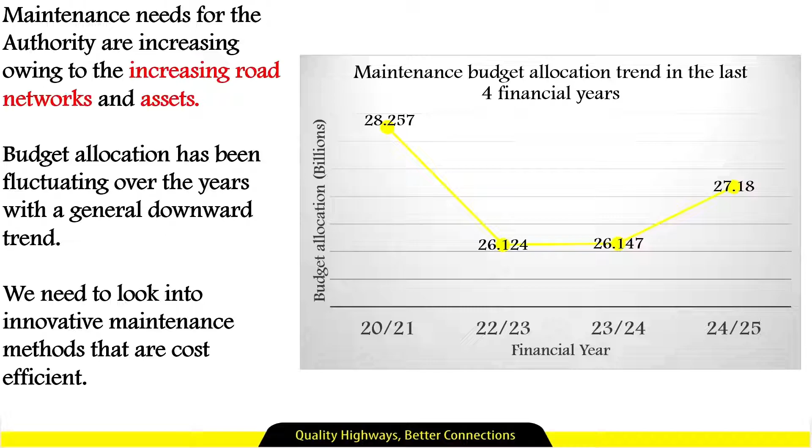For this reason, it is important for us as civil engineers to be very keen on our maintenance processes. Now I'd like to provide a brief background so you can understand the nature of our problem. Maintenance needs for the authority have been constantly increasing because of the increase in road networks and road assets. As you can see on the graph of budget allocation against financial year, the budget allocation has been fluctuating, but with a general downward trend. So what does this mean for us? It means that the money we have cannot cater for our maintenance needs. It then prompts us to think of innovative ways that are cost-effective while at the same time efficient in managing our bridges.

Let's have a look at bridge management. Traditionally, bridge management systems were characterized by being visual and manual.

Bridge management processes traditionally relied heavily on visual observations and manual processes such as destructive tests and non-destructive tests. For example, acoustical tests like the hammer or the chain drag, or other tests such as magnetic particle testing for identifying fatigue cracks in steel bridges.

It was also characterized by being reactive, where we would only take action when there's extreme deterioration or total collapse or sectional collapse of a bridge. Again, it was characterized by being standardized, where all types of bridges would be subjected to the same kind of maintenance treatments, regardless of the type of bridge.

This resulted in various limitations, such as delayed detection of damages, or high costs. Again, we also have the lack of safety to bridge inspectors, and also the process could be subjective because the kind of inspection results from one bridge inspector to another would be different with human errors.

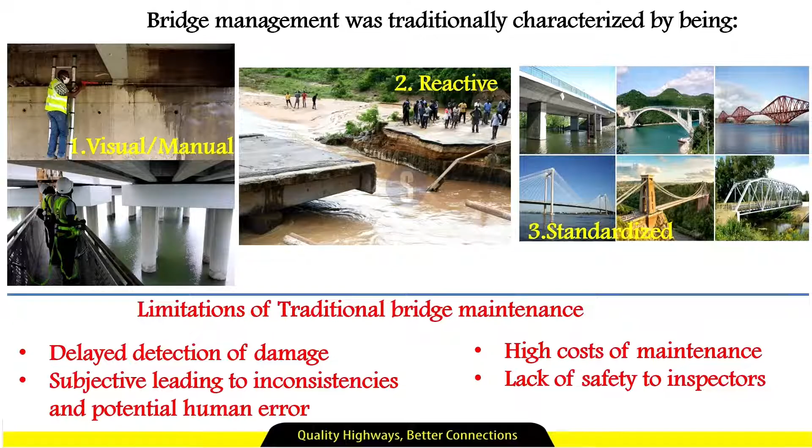So as engineers, all over the world now, engineers are thinking and asking themselves, how can we make our bridge management systems be predictive rather than reactive? How can we ensure that the results are not subjective? How can we ensure less costs, and how can we ensure safety to our inspectors.

So this leads me to this next slide, which is on the integration of artificial intelligence on bridge management processes. So what is artificial intelligence? Artificial intelligence is the simulation of human intelligence processes by machines.

The creation of the AI model will depend on what you require. What do you want your AI model to perform? So we have several building blocks like machine learning, neural networks, computer vision, natural language processing, and robotics. You can use one or a combination of these building blocks to create your AI model.

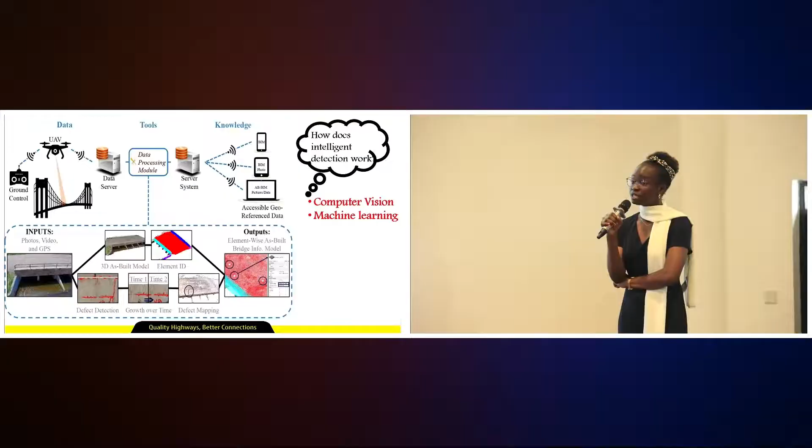As you can see on this slide, today we have several equipment that are used in the bridge inspection processes. For example, drones, high-resolution cameras, and even 3D scanners. These equipment are now integrated with AI tools, for example, machine learning and computer vision.

This equipment provides us with data such as photos and videos, which we can then input into our system. As you can see on this slide, the system can generate for us 3D models, either from point clouds or finite element analysis models.

The system can also be able to detect defects on the surface of the bridge and monitor its growth over time, and even map it on the 3D models. And this can be very efficient in allowing us to do our monitoring processes.

So I'll discuss two examples for intelligent detection. In this example, we have crack detection with AI analysis. We have high-resolution cameras or drones taking photos of a section of a bridge that we're particularly interested in. And then, with the AI detection system, we are able to map the cracks on the surface of interest.

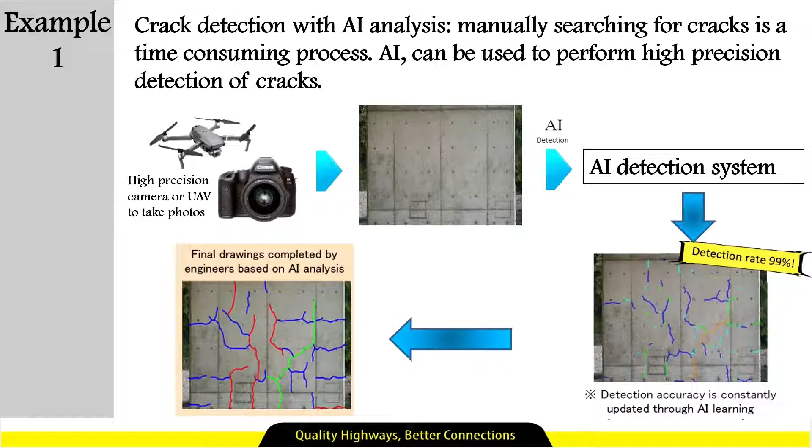For example, in this case, the AI detection system used is called Kumonos AI, and it is a system developed by Kumonos Corporation in Japan. It has a detection rate of 99%, and the accuracy is constantly updated through AI learning.

This is important for us because instead of going to site and randomly checking where the cracks are, or manually searching for the cracks, the system already tells you where you need to go and look.

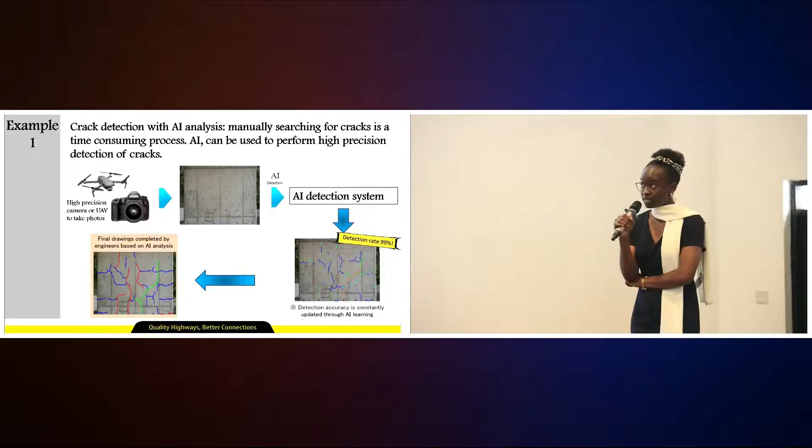The second example is again an instrument from the same company, Kumonos Corporation. It's a surveying instrument that has a built-in concentric crack gauge, and it can be used to obtain the crack lengths, the widths, and the position data.

So these two examples fall under intelligent detection. Next, I will discuss digital twins.

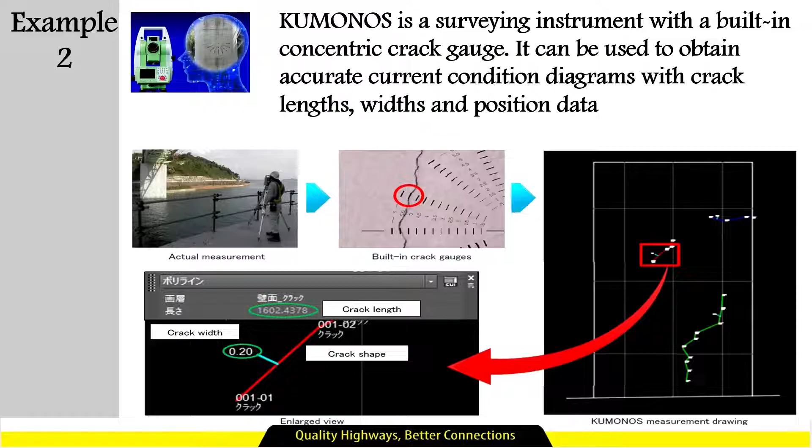Next, I will do a discussion on digital twins. So what is a digital twin? In our context, a digital twin refers to a virtual representation or a virtual model of our bridge structure.

For example, let's say we have this particular target bridge. We use a 3D scanner placed at different setup locations around the bridge, and we obtain data from it in the form of point clouds. We can then use this point cloud data to generate a 3D mesh representative of the surface of the bridge, as you can see in this photo.

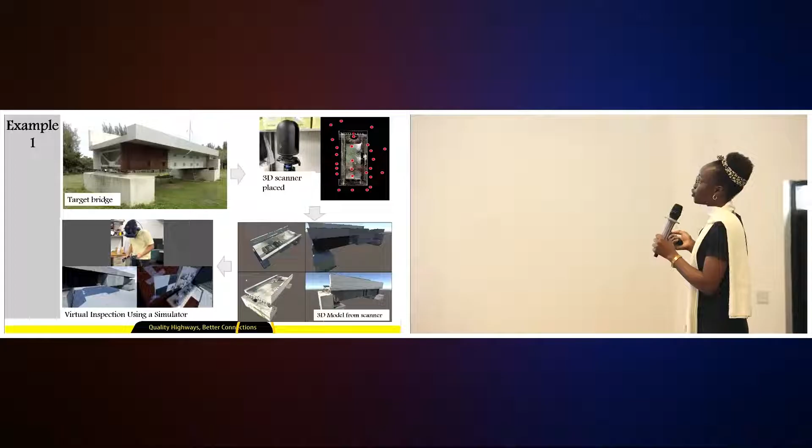The 3D model can then be integrated with AI such that sensors installed on the target bridge continually, in real time, feed the 3D model so that it is able to mimic the behavior of the bridge. Currently, there are even studies to see if we can undertake virtual inspection using virtual simulators.

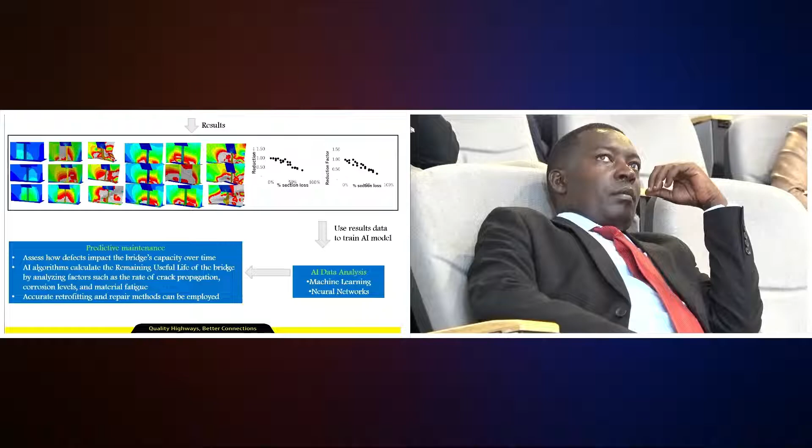So from this particular simulation, we're able to get results in various forms, and these results can be used to train our AI model, through building blocks such as machine learning and neural networks, to enable us to undertake predictive maintenance.

For predictive maintenance, we are able to assess how defects impact the capacity of the bridge over time, and AI algorithms will be able to calculate the remaining useful life of the bridge. Finally, we can undertake accurate retrofitting and repair methods.

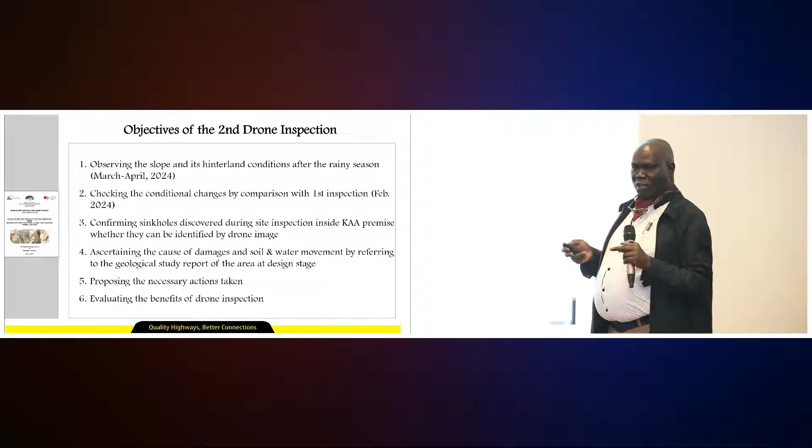So we use the drones to observe the slopes and its hinterland, and we do this after every rainy season. Then we compare the slopes. The rainy seasons for Mombasa are February, March, April, and then the current season we are going into is the long rainy season. So we did one inspection during the first rainy season in February, March. We have just finished the second inspection.

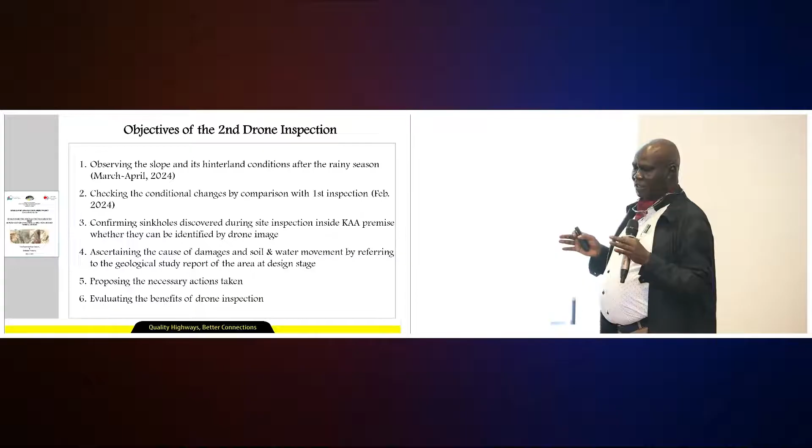And from these inspections, we have realized development of some very interesting things called sinkholes. These sinkholes are extending all the way into the premises of the Kenya Airports Authority, beyond our right of way. We use this data we collect to ascertain the cause of the damage. It also helps us look at the soil characteristics and the flow pattern of the water. And with that, we can accurately propose necessary actions to be taken. So this is a very useful tool for evaluation as it saves on time.

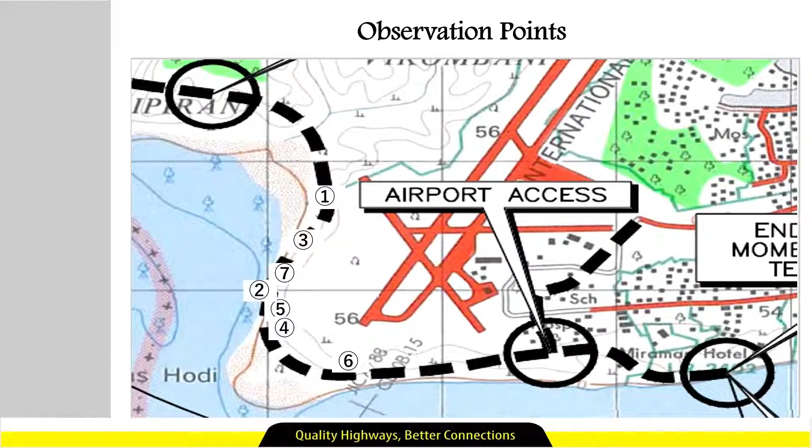Now, that is a map of the area of package 1. This is our road, that is the airport. So package 1 runs from Miritini up to the port gate. This is the area where we had the massive failure.

And so we constantly are monitoring these areas to ensure that we don't encounter that failure again. You can see this is the runway, and in the course of that first failure, we lost part of this runway. Very expensive to reinstate.

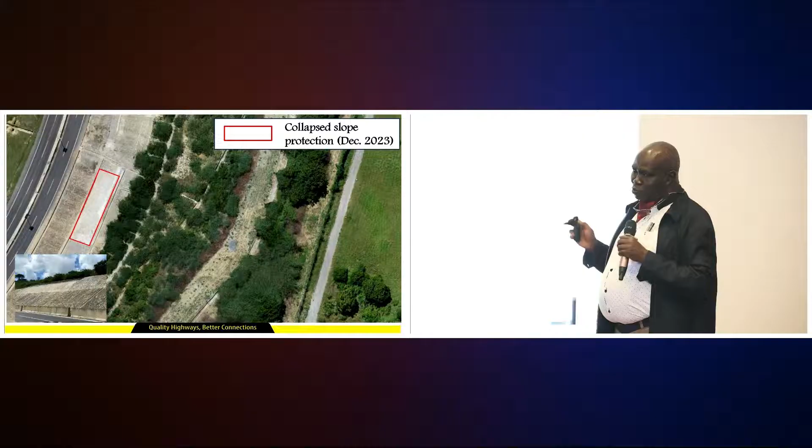And now this is what the drone is able to give you. This is protection works, you can see protection works that we did on the slope. And constantly, there are certain things developing here that are called sinkholes. These sinkholes are not easy to detect in good time by eye. And so the drones help us to detect the approximate areas where there are sinkholes. And then we can also monitor the state of the slope, whether the slope protection is still holding or it is in imminent danger arising from these slope failures.

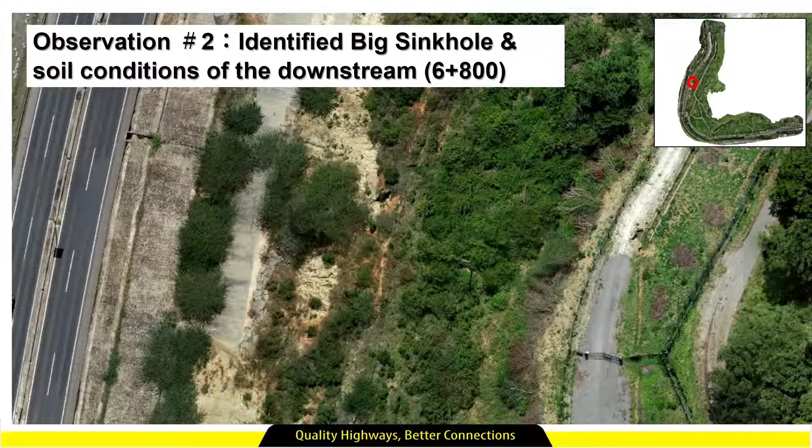From what we did in February, you can see something here, and then you can see something here, you can see something there. Those things that are circled, those are sinkholes. And these sinkholes pass water vertically, then eventually the water gets its way laterally. Finally, it pushes our slope protection and results into that slope failure.

You can see this. That is a sinkhole that we're able to detect using a drone. From our slope protection, like here, we built a drain. These drains are also now, because of the sinkholes and the water and soil flows, getting slowly clogged and not serving optimally.

Now this sinkhole, after they have been identified, you can now use survey equipment to give you the exact location of that sinkhole. Then we are able to walk there. Then you can pick a lot more details of the sinkhole. Now what you see here, look at it - that is the sinkhole. And this sinkhole is inside the KAA premises, but its impact comes to our road.

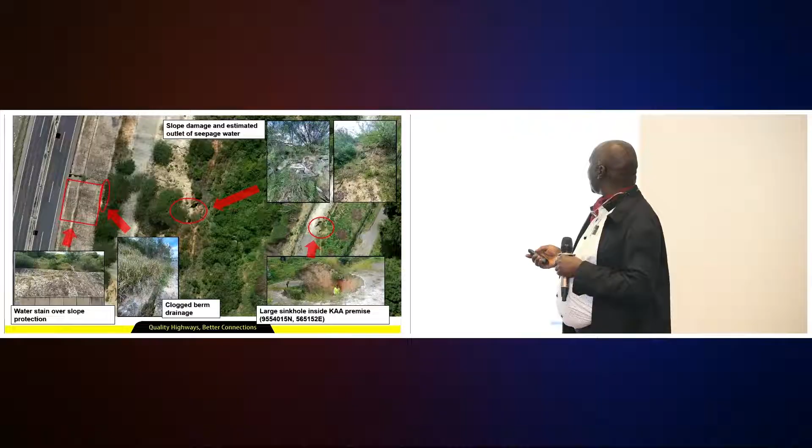You can see how deep it is. That is a human being right inside. And so if this is not quickly attended to, then you know what it means in the next few months.

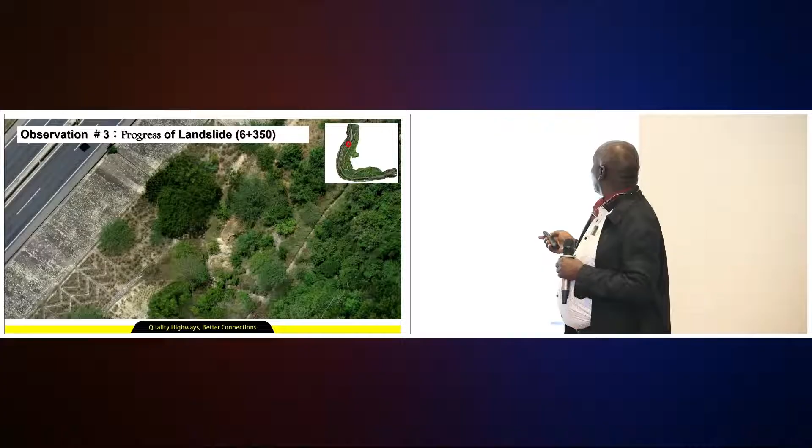Again, look at that sinkhole, and the sinkhole is already impacting on our slope protection here. So there's the danger of losing the whole of this slope pretty soon.

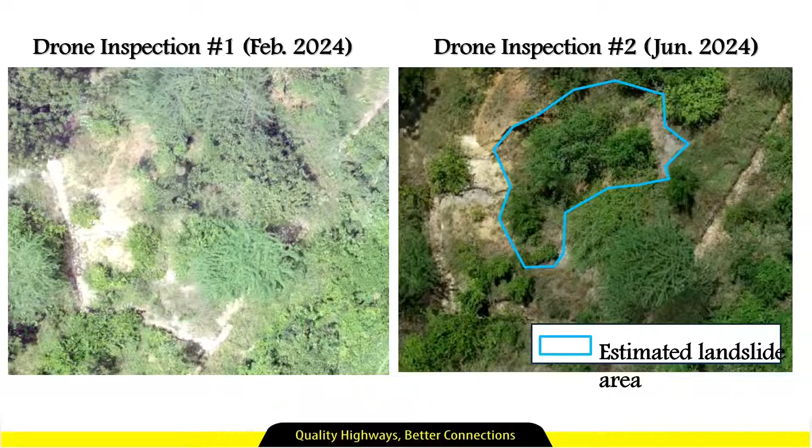Now, after identifying these things in February and now in June, we are able to estimate the size and also start detecting the manner in which the landslide is going to propagate. So with this, we can see that the whole of this and the whole of that is already a potential slide.

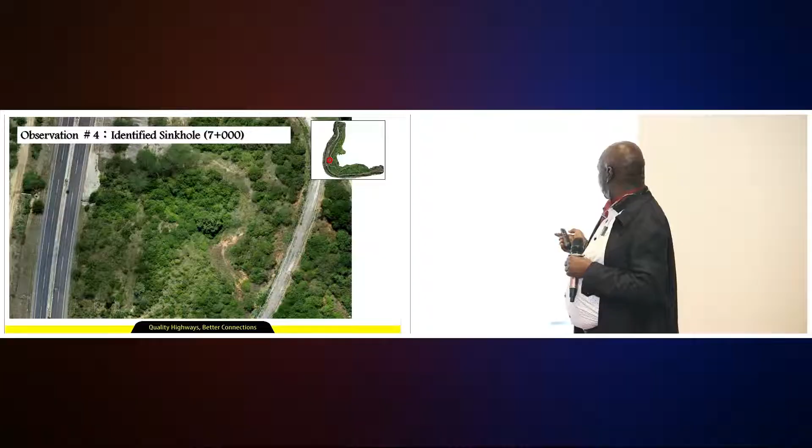Another sinkhole developing at kilometer 7. So after we capture the data, we can now physically go to site and pick a lot more details of the sinkholes. And then this is the pattern that the failure is going to take.

So with the drone and the survey equipment, we can get the actual coordinates, and then we are able to now send inspectors and get a lot more details about the sinkholes that are being propagated. Now, this is the estimated area.

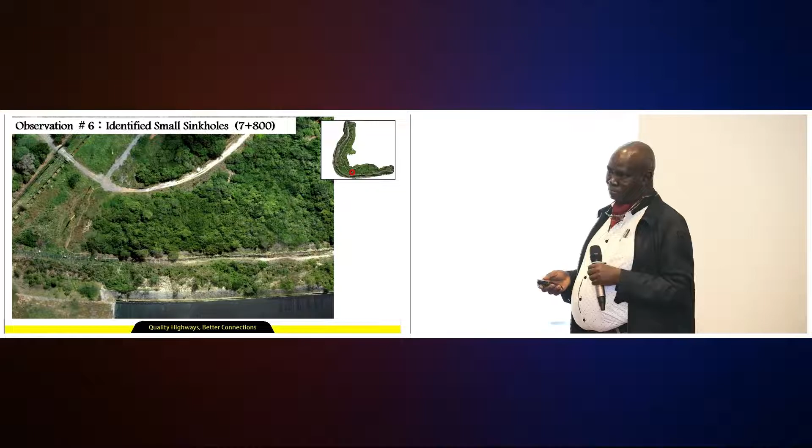So again, a lot more sinkholes. You can see them after we have identified with drones and located them. Then we now walk in there and pick more details.

Look at this now, this is our slope. The water from the sinkhole goes down underground and splashes over our slope, because the drain here is already clogged and already impacting our road.

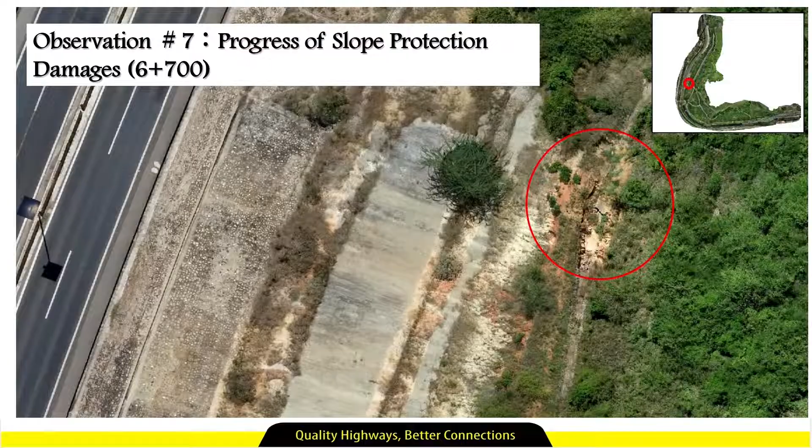After that inspection, we are able to do a comparison between the data we pick and the geological information of that area. This area, the soil here at the time of inspection, design—we can link what we have picked now and the information that we had at the time of design. Then, using that, we can now accurately design countermeasures to stop these failures.

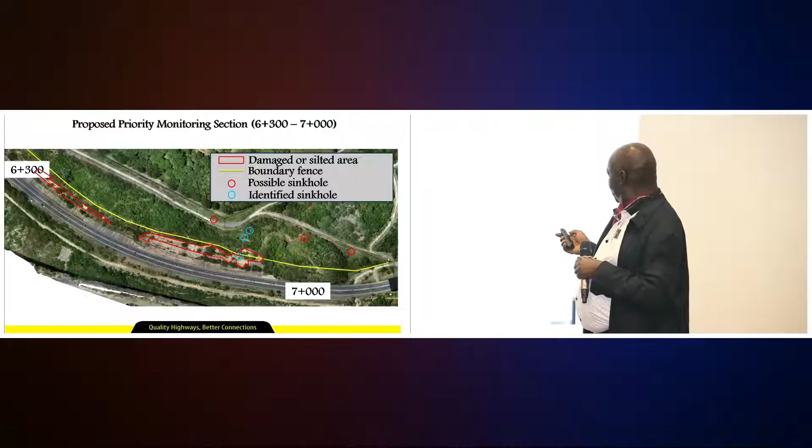So we are already preparing for huge failures here, huge failures there. You can see our patrol roads, already a huge crack there. Look at the sinkholes. So we are sitting on a time bomb. That is the area we are monitoring.

This is already the damage occurring from the water that is coming from the sinkholes. The water seeps vertically, it forces its way laterally. You can see our slope protection is already giving way.

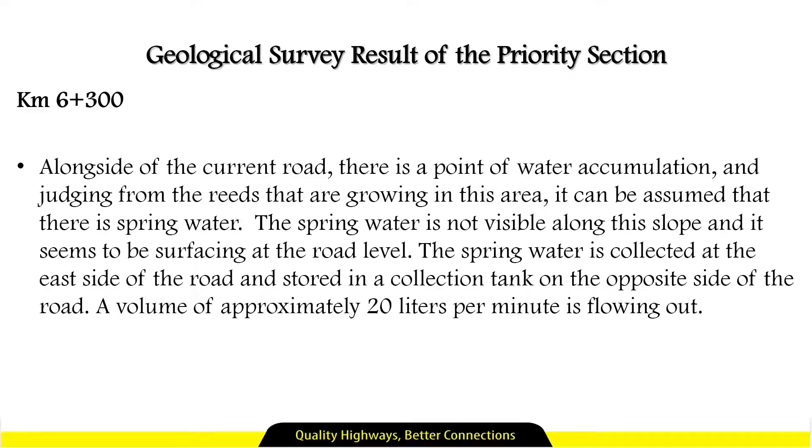Now the history of this area is that, other than these sinkholes, there is an area that has water accumulation and springs. And even in dry season, we have this kind of flow out of those springs into our road, about 20 liters per minute. So we need to plan how to capture that and safely take it into the natural drainage system.

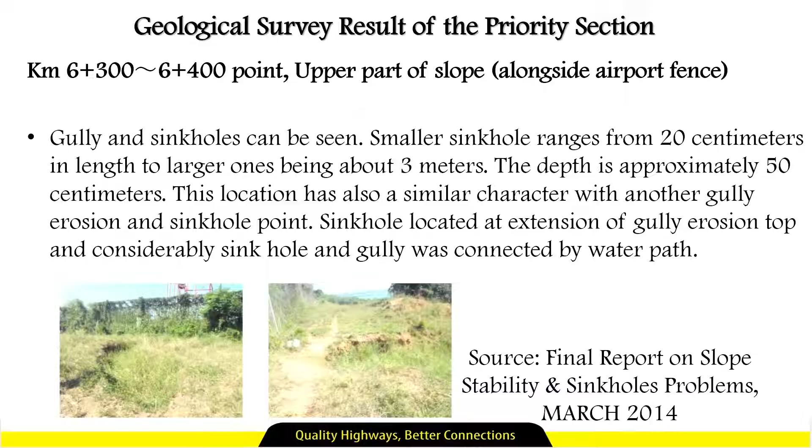Now, with the drone we can see gullies and sinkholes. Look at the depth of some of these sinkholes. Started as very humble things in February, gradually growing. This is the damage already occasioned up to now.

As an immediate intervention, we are proposing that we unclog the drainage, desilt the area, remove some vegetation, but we need to start planning now for proper subsurface drains to protect this slope.

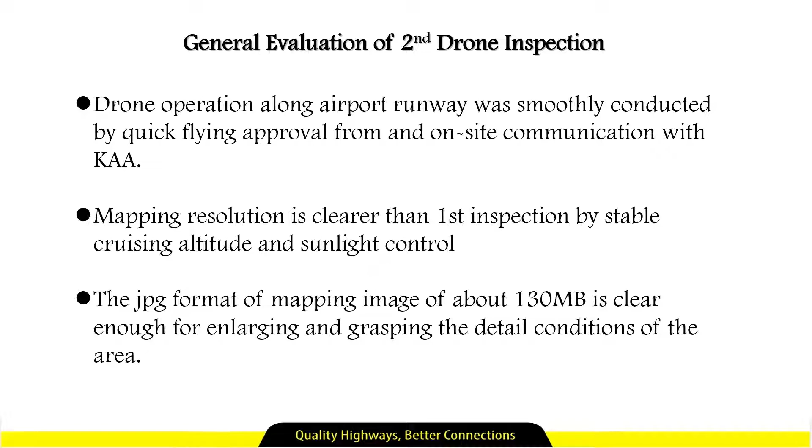So, as I've said, we do this operation jointly with the Kenya Airports Authority, because that is a protected area. You can't even fly a drone without permission from Kenya Airports Authority. We share this knowledge with them. Actually, as we talk now, they have already used the data we have given them to source for money to start maintenance of their areas, so that they don't have another failure, another collapse of the runway.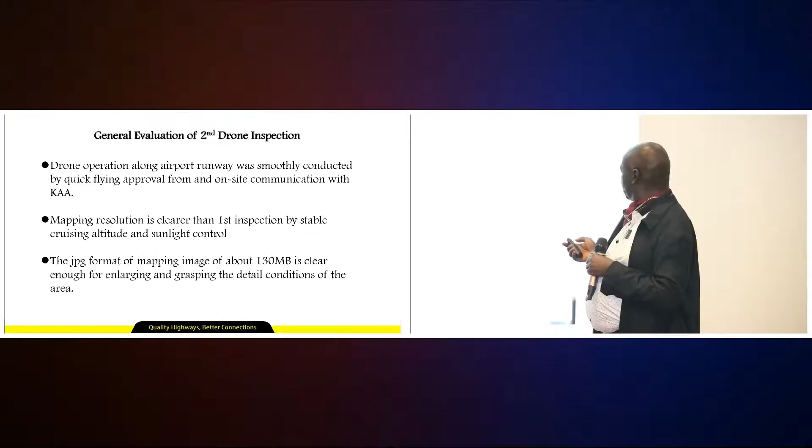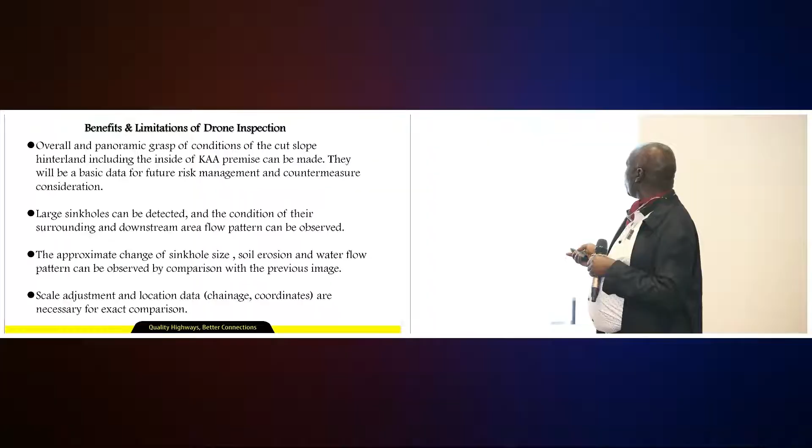So drone inspection has several benefits, quite similar to what Engineer Dorcas has shared. We get clear pictures, we get to cover huge areas, we detect these things early. We can accurately estimate their sizes, the pattern of soil erosion and water flow, and then quickly see how to start mitigating before the slope finally caves in.

Visual inspection is cumbersome, although for final details we still have to send people to get details into the sinkholes. But now they don't need to walk the whole area. They will be going to a specific place that has been identified using the drone.

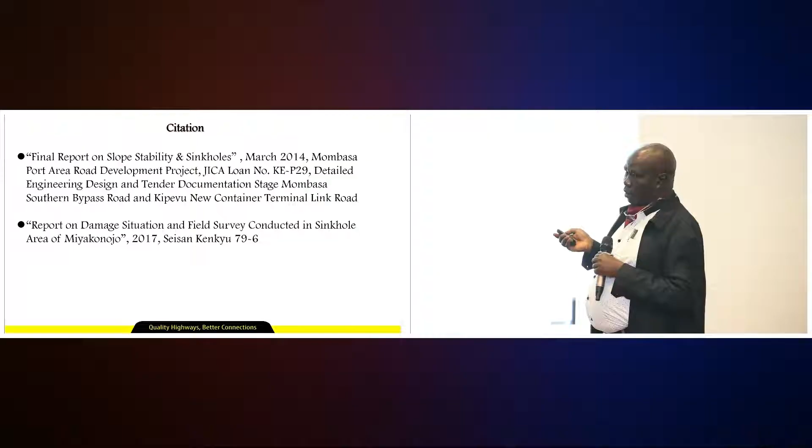These reports we are doing jointly with Nishi, who is an expert from Hanshin Expressway. And we are finding this an extremely useful tool that will help us, not only in this area.

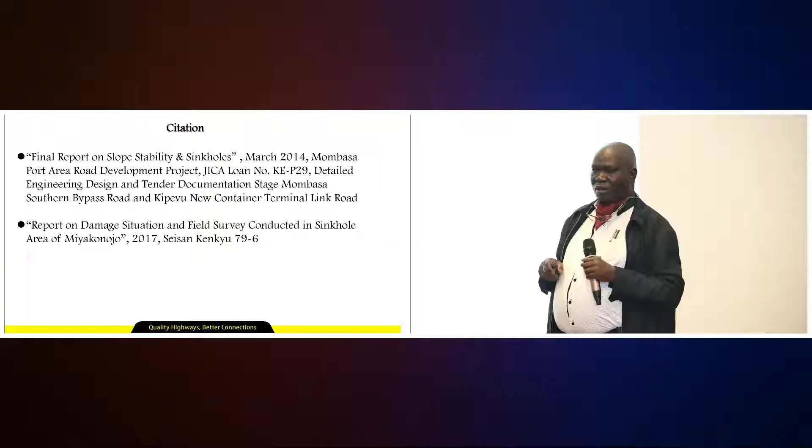Once upon a time, when I was still, I think we were in Eastern Province with Engineer Gatitu, there was an area called Mutonga. There was a very huge landslide on the road from Embu to Meru. And the funny thing with landslides, you know the times that they happen. When you are enjoying your sleep most, they normally happen around 2, 3 a.m. The one we had on Mayu Road the other day, it happened at what time? It was 4, 5 a.m.

And so you can imagine, least prepared, but the damage is massive. So this is a tool that we encourage, that we embrace as an authority and use it so that in all our roads, particularly the ones with high slopes, we can constantly monitor these slopes and mitigate in good time. Thank you.

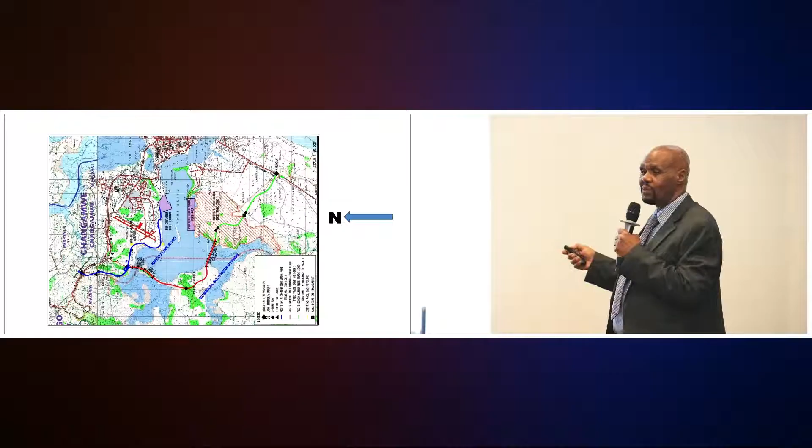Around the airport here, when we were doing the designs, we had encountered the sinkholes Engineer Ogege is talking about, but after looking at it casually, we assumed they are stable, that the ground is stable now and we don't need to do anything else. That casualness - being that casual - you can see the danger that came later.

We had noted there were sinkholes here, but one of the problems is what happened around 2019, 2020 - the airport was doing some renovations inside. The moment they disturbed the equilibrium, because it is a dynamic one with water, they broke something - even they don't know exactly what they did. They broke some waterways there, and the water now came this way, and there was failure. This is why we had a problem here, and there was another landslide there, and even here, this is now where Engineer Ogege was saying it broke.

Okay, that is now package 1 and those challenges.

Package 2 starts from here, crosses with the first bridge here, 660 meters, at Mwache. And then through here, initially at the design stage we wanted to do an embankment this way, because from the video shoot we were showing you, you saw that this area is marshy - at high tide, water comes up to that place. But because we wanted to cut costs, instead of having one continuous bridge from here to that place, what we did is we had a bridge there and an embankment in between. Then at Mteza we have got another bridge of 690 meters.

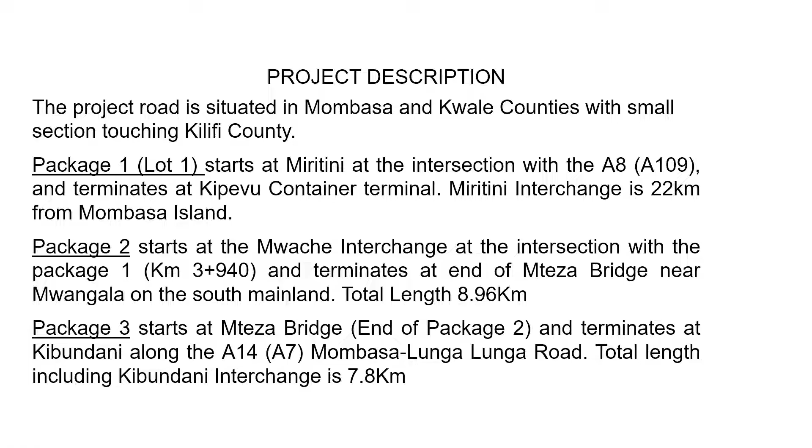Now I have quickly outlined the 3 packages. The first one is about 11 kilometers, which I have shown. Package 2 is about 9 kilometers. Package 3 is 6.8 kilometers, plus 1 kilometer along the A7 road, making a total of 7.8 kilometers. Now I want to quickly give you a brief on each of these 3 road projects.

The reason this pavement is heavier on this side is that it carries all the road traffic right from the port. Most people hauling material from the port fear damages, so they try to clear their cargo with trucks that are not weighed. That's why we had to put a heavier pavement than the other sections.

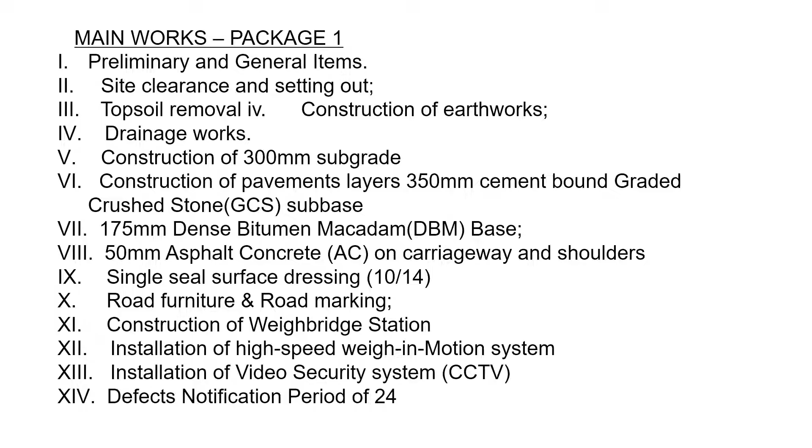We also put a weigh bridge, a weigh-in-motion system, at kilometer 1 from the start. We had put CCTV cameras around the airport shelter area, but they were vandalized. We also installed street lighting, but because it was conventional, other people came and vandalized the system. Now, during dark periods, people vandalize the CCTV and other installations.

Major structures in package 1 included Miritini, the first interchange. We have a U-turn bay at kilometer 1 where you enter the weigh bridge, and then the weigh bridge station just ahead. Then the Mwache interchange, and we have the Mukupe jetty. There is a bridge structure there, but we decided not to carry very heavy road traffic, so we restricted it, mostly for use by fire and rescue services and fishermen going to Mukupe.

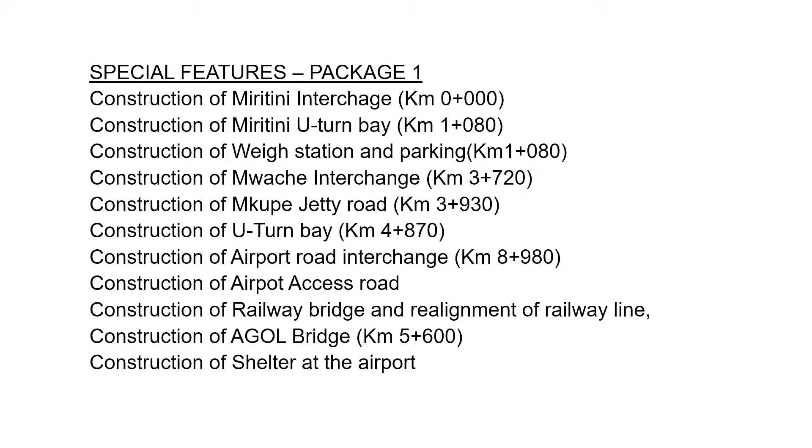At kilometer 4, we wanted to put a U-turn bay, but once we introduced the SGR, we realized that in future people may tend to come and clog the main carriageway. So we added another box culvert to make it look like a roundabout on top, such that people don't have to stop along our main carriageway.

Then there is the airport interchange, and the airport access. We also put a railway bridge. We moved and reconstructed about 1.4 kilometers of the existing meter gauge line at the beginning.

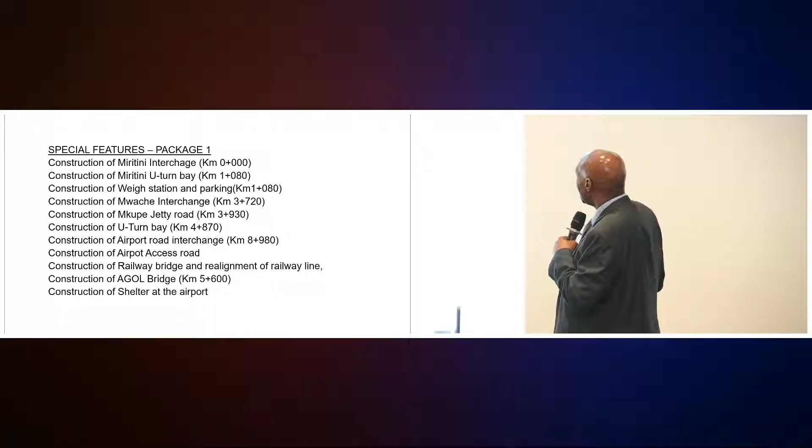We have a long bridge of about 110 meters at AGOL, which is the gas place. And then we have the airport shelter, that's the airport shelter there.

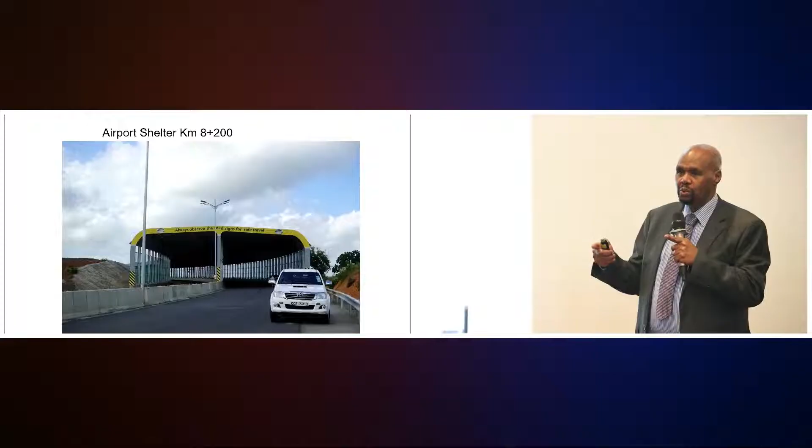People thought it's just something simple, they don't know the reason why we had to put that. KCA demanded that unless we have a shelter of this nature, this road could not be located at this place because it's quite close to the airport runway. That's why we had to put this shelter. It's a kilometer long, and the middle part, which is 100 meters, we had to construct as a box culvert type, thick, such that even if somebody were to come with a bomb, they can't easily blow up a plane that is landing.

This is almost where Engineer Ogege was showing those other slopes. This is at the Mwache interchange.

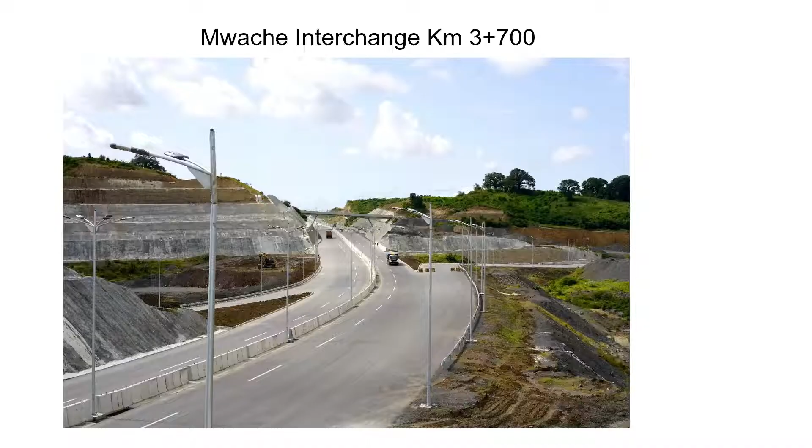From here, our road, if somebody is coming from Nairobi and wants to go to the southern bypass, you turn through behind Yapa, go behind somewhere below there, and come out there. And if you are coming from South Coast, you can join the main highway here. So the slopes Engineer Ogege was showing are not only on one side, they are on all sides. This area is again very difficult, it was rugged terrain, and we had to position our interchange from here.

One of the key things about this project, package one: the contractor was China Civil in cooperation with another railway, number 11. The consultant, we being one of them, were a group of 6 consultants. The contractor side had 2, but the consultants were 6, and I've listed them there.

Katahira, Oriental, Anshing, I've missed out Anshing. Then Norken, BAC, Uniconsult. 6 of them.

We started in May 2015, a contract of 3 years, and we finished dead on time, 3 years exactly, on 17th of May 2018. Our contract amount was approximately 11.5 billion equivalent in Kenya shillings. We concluded at 11.55, with about only 24 million shillings above, and that's due to other reasons.

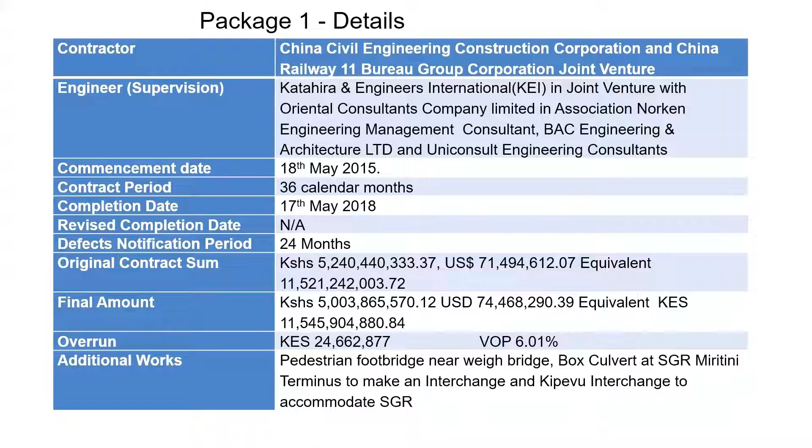That's why we were able to do the project within that cost. There were a number of other variations we did. Some of them were like the pedestrian footbridge near the weighbridge, the SGR, and at Kipevu we put another interchange.

One of the other things we spent a lot of money on is that although the area around kilometer 6 failed, we had done quite a bit of work but it was not completed. We thought what we had done was good enough because we were trying to protect the road, but we were not protecting ourselves right from the source of the problem at the airport. So we spent quite a bit of time and money, particularly from our other savings from VOP and others, but what we had done was not good enough, and it cost us an additional 700 million, which was funded from JICA through package 3.

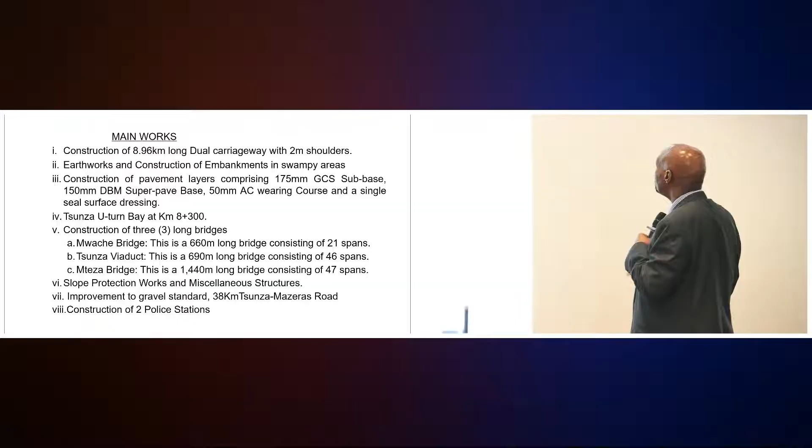Yeah, that is package 1. I can go to package 2. The main works are about 9 kilometers of dual carriageway.

This one has no much of interchange, it's only one U-turn bay. But in terms of earthworks, we have got very difficult material because we are putting embankments in the sea. This is the package where we were working right in the sea. At least the others were just circumventing down to the sea area through the shores, but package 2 is where we are going through the sea.

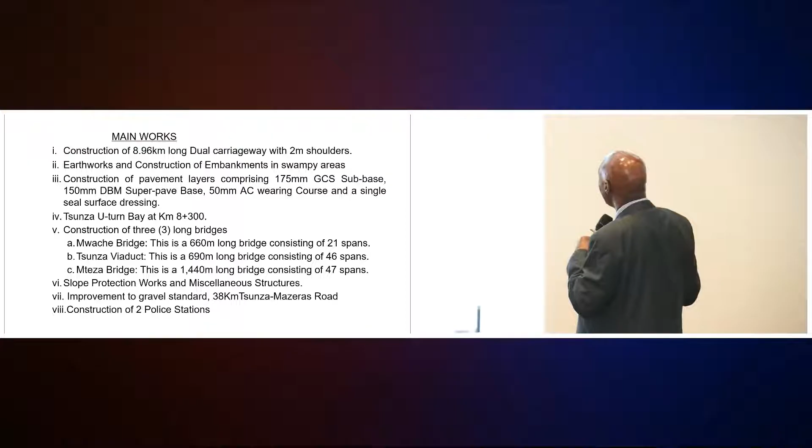That's why we had to come up with a way of treating the swamps. Then the pavement is slightly reduced: GCS is 175, DBM 150, AC remains 50. Then we have a U-turn bay at Tsunza.

Here we have got 3 bridges. The first one is 660 meters, with 21 spans. 3 of the spans are 40 meters, but the others are 30 meters. And you can imagine each span has got 10 girders — that's why Owen was saying the number of girders we produced are many, for 21 spans.

Then the Tsunza Viaduct is 690 meters, 46 spans. We call this one a viaduct because it's like a low bridge — there are more spans here because it's not for navigation, so our spans were shorter, 15 meters. That's why we have 46 spans.

Mteza is 1,440 meters, with 47 spans. Again, 3 spans are 40 meters, the others are 30 meters.

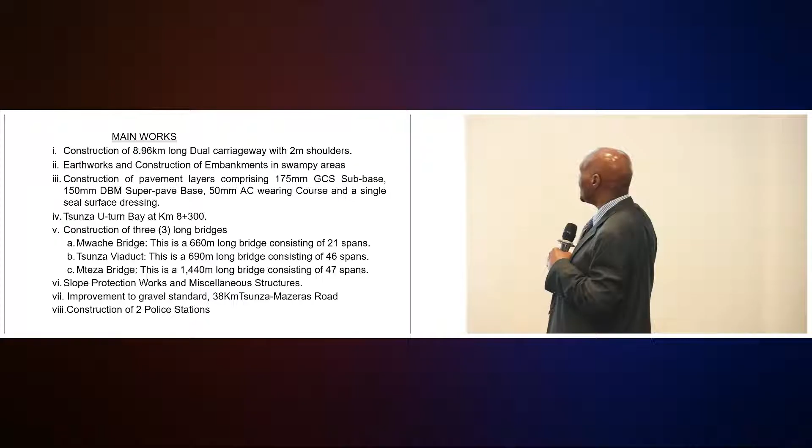After learning the challenges of the slopes in package 1, we improved a bit in package 2. What we had intended to do in package 2 for slope protection, we changed a bit.

Then also CSR — we have gravelled 38 kilometers from Tsunza to Mazeras. We have also constructed 2 police stations, one at Mwache, the other one at Tsunza.

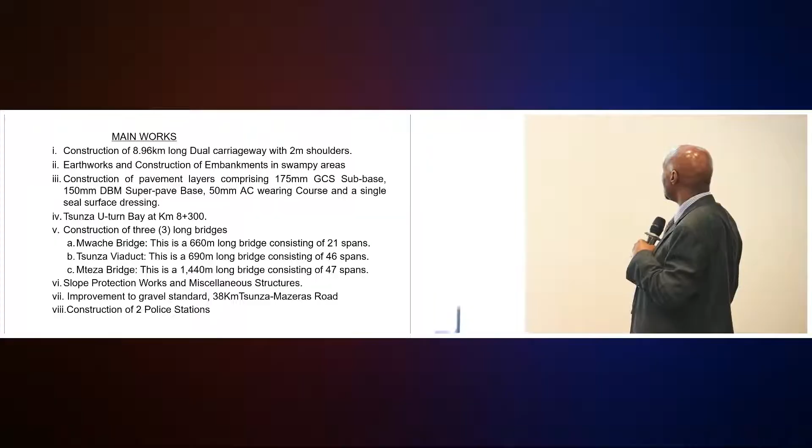Yes, this is Tsunza Viaduct. You can see our pedestrian walkway. We are not using normal steel guardrails, we are using concrete. That means they are less prone to vandalism.

So right now we are changing anything that we think could be susceptible to vandalism to other alternative means. For example, instead of using steel guardrails, we are using concrete parapets. And for our concrete barrier, in order to move fast, we were using slip form, a continuous pouring.

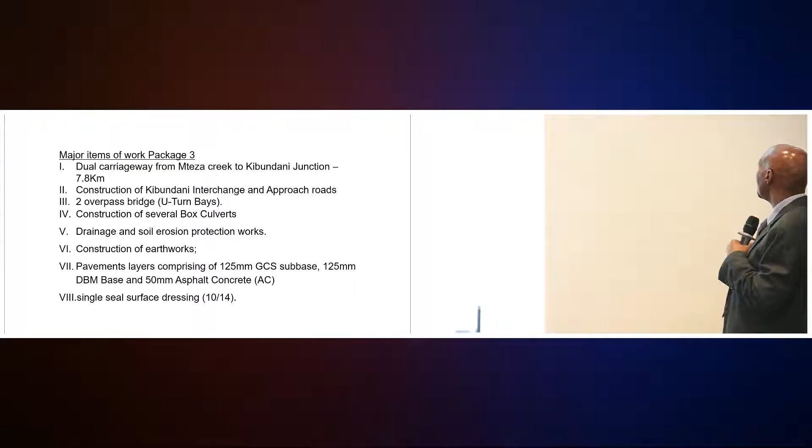Yes, this equipment is continuously pouring concrete as you move it, for us to move at some fair speed.

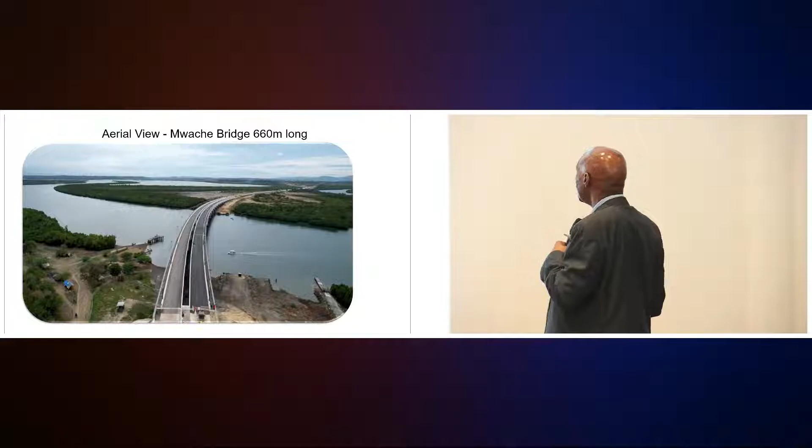This is Mwache Bridge, where we started package 2. When we play the earlier footage, you see how the place used to look before and how it is right now. This was the firearm jetty that the military used to evacuate their military hardware. I said earlier that this area is marshy, part of the sea. We would have preferred to put a bridge across here, but instead we have put 660 and another bridge 690. In between here, we are using embankment. And this is the long bridge, Mteza Bridge.

Viewing from package 3 direction, those are the spans. You can see the spacing of the spans here is 30 meters, and the central one there, to allow for bigger navigation, we put 40 meters.

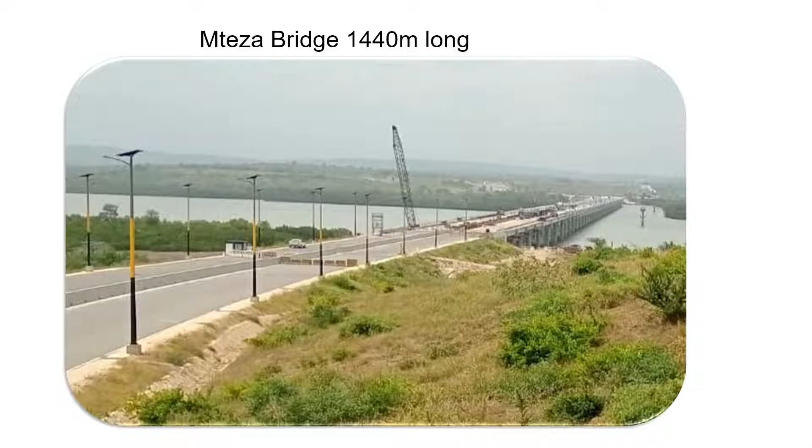Few things about the project also: it was tendered in 2017, but the award of contract was in 2019, and we commenced the project in March 2020. We gave the contractor order to commence, but a week later there were lockdowns because of COVID-19, and so we suffered a lot of other challenges. But all in all, even with that, we have been able to attain substantial completion within almost the time we said we were supposed to finish, on 13th or 12th March 2024, but we were given an extension of 123 days, which is basically 4 months and over.

The project equivalent was 24 billion, 24.2. To date, we are at 22.6. There is that balance there. We have not finished everything, but we are almost within the contract sum. If we exceed, it will be by a few cents.

Variation of price in this contract, this side, because now we are in the period whereby prices have escalated too fast, is where we are at 18%. I said the other one was 6%. This one is 18%. I think still comparing to other projects, our project's VOP has been the lowest—maybe that one somebody has to confirm, that's an allegation from me.

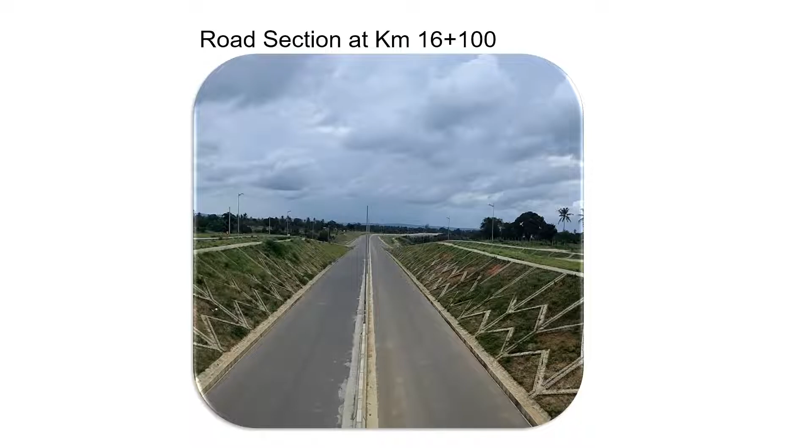Few features, you can see our slope protection. This is a U-turn bay at Mwangara. We have improved on the slope protections. Some of these places we thought we would plant grass, but the moment we noted the sign of shale, we were changing—but we were changing when we were already on site.

This is at Kibundani interchange. By the time you come to Kibundani interchange, the soils here are good because you are on coral. The problem with our road is the soils keep on changing within very short distances.

Few highlights of this project: it was also tendered in 2017, but we started in 2019, and it was to be 24 months. Within the first 24 months we had finished, but because of land acquisition, we could not finish Kibundani interchange, and so that's why we have been on site from that time.

The contract price was 4.7, but now where we have reached is 4.9. So there is an overrun of 157 million, which is about 3.3%. The VOPs are around 14.5%. I am putting this because of a comparison with the other projects, because a number of other projects in the later stage, the VOPs have tended to be even sometimes going to as much as over 50%. So we want to see maybe the lessons learned from ours, so that you don't have to make the same mistake we also made.

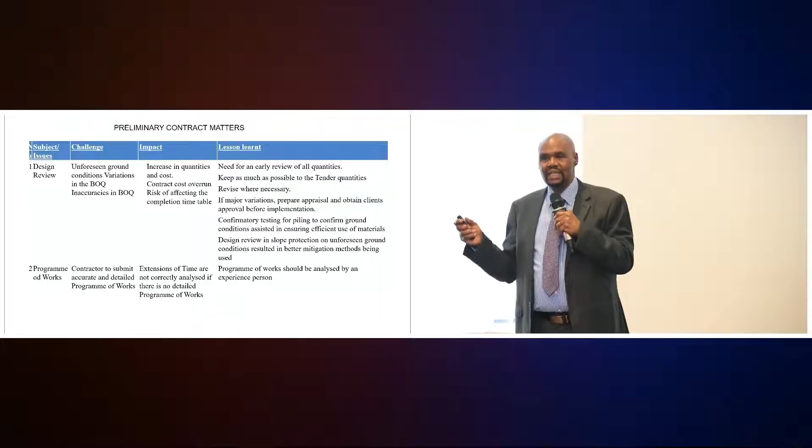Second, the program of works. The contractor gives a program of works, and that program looks detailed, but the supervision team sometimes doesn't look at it in detail. This program of works is a very important tool, particularly when it comes to claims.

So if the contractor points out that he can do a certain work within, say, 6 months, and you have not picked it up, and maybe because of his other challenges he does not do it in 6 months, he can start blaming it on you or on the client. But from the very beginning, his equipment was not capable of doing it in 6 months. So it's necessary for an experienced person to look at the program, look at the equipment the contractor is using, and see how reasonable they are, and even the sequence of things.

Second, when it comes to things like land acquisition, if it is not done, you can influence the contractor to take a certain path, particularly if you have not acquired the entire corridor. So you influence him to change, so that he can start with the areas that you have paid for, giving you room to deal with the rest. It's important that at the very preliminary stage, somebody looks at these two carefully.

Now, as I said, staffing was one of our challenges—the number of consultants coming from all corners of the world. And then you, as the team leader, want to get them to do the same thing. People have different experiences, people have different backgrounds, but one of the things they know is, first and foremost, they have to do things the Kenya way or the Kura way if it's a Kura project. So those people don't assume anybody knows.

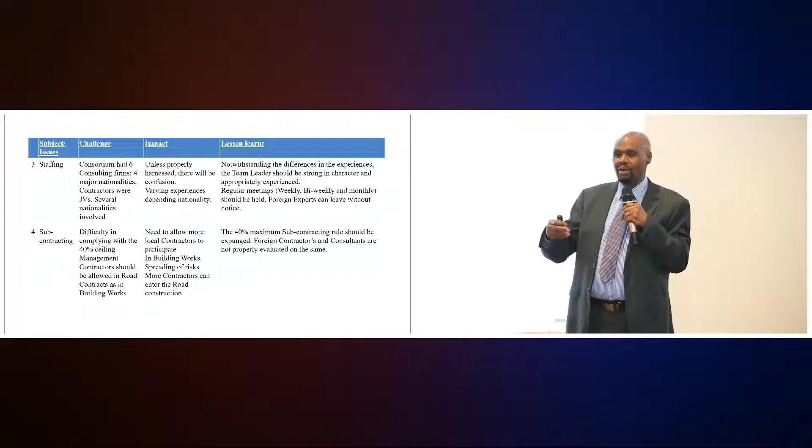So there is that problem of limitation on subcontracting. I think in Kenya we need to revisit that and see how we can promote our own contractors. It's very well implemented in building works—whoever is called the main contractor there is doing very little. He brings a plumber, people for plastering, different groups at different times, but he manages it. The old system is very expensive and makes it difficult for our local contractors to enter the race.

Together with that, people can specialize in whatever they do. They are able to bring the expertise in specialization.

When we are doing the construction works, please, even the design engineers, particularly structural, try to standardize your design. It doesn't make sense to have one culvert 5.5 meters wide and the next place a 6 meter wide box culvert—the contractor is forced to do different formwork. If you standardize, the quantity of material may increase, but it is efficient and contractors will tender much lower.

Because of the standardization of the girders—40 meters for some, 15 meters for the ones at Sunsa—they could be produced in a factory setting, and we were able to move fast. The girders could be produced even when it was raining, since you are not limited by being in a factory setting. There are a lot of advantages in standardizing structural elements.

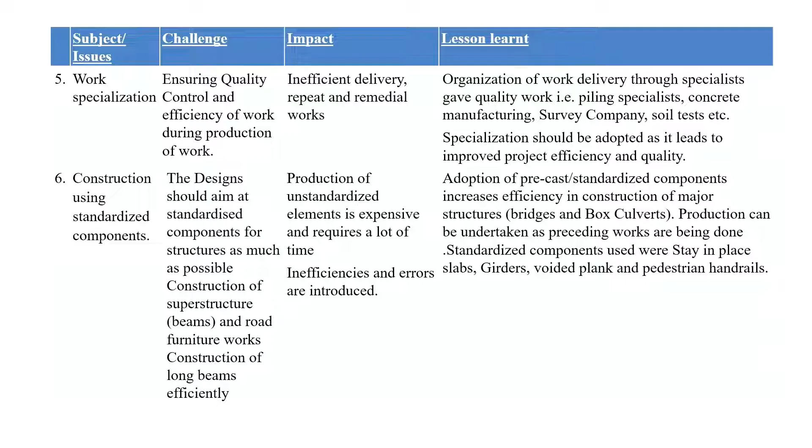The other thing is that in major projects, it's not good to have the locals become bystanders watching the game from far. It's good, particularly from the client's point of view, to find ways of involving the local community. In our project, we involved community-based organizations in planting trees, like mangroves, and they did a good job.

Under normal procurement requirements, the locals are often not properly registered, so they cannot participate. But if you have some PC items that locals can participate in, that is very good, because then they own the project, and it reduces a number of challenges you have as the supervising consultant, since they feel they are benefiting somehow. It's not much even, but that little makes a big difference to them, and then they own the project.

Other challenges, like land acquisition, become easier because they can see the project benefiting them, like the coast people said—it's benefiting them, it's not just a project for the Chinese or the Japanese. So since they benefit monetarily, they feel ownership, and that helps a lot.

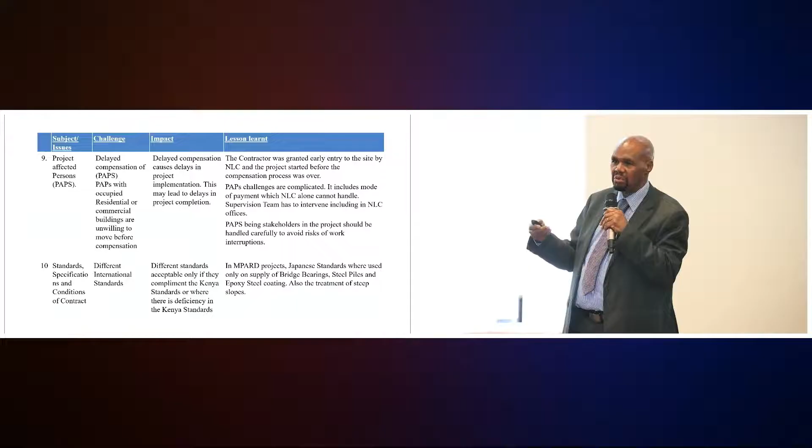Bearings, we also use this. I know we use elastomeric bearings for normal bridges, but in this environment in the sea, we had to use a different type, it's still pot bearings, but we use the Japanese standard because they last longer and they are more durable. And our bridge, since it's not straight, it's curved, we thought they would do better with the higher standard.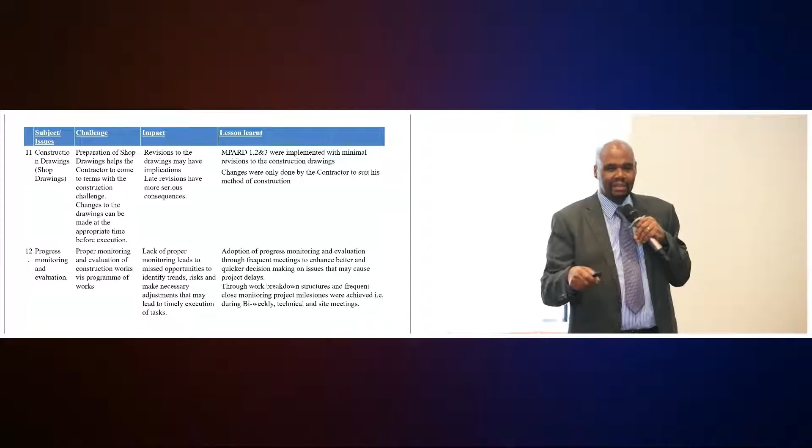When we start the construction, insist on the contractor producing his shop drawings or construction drawings. That way, when the contractor is producing his drawings, he gets to understand, until he has done it. But you see, the problem sometimes is you tell the contractor to produce shop drawings, he takes the engineer's drawings, changes the title block, and returns it to you. That's not the essence. Let him produce his own shop drawings.

That way he gets to understand what the challenges are. Because then he prompts you. He comes to the engineer because he realizes the way you put one of those things may not work. And it helps you see the weaknesses in your design, because he is the person who is finally going to do the construction. So it's necessary the contractor produces his shop drawings.

From there, our monitoring and evaluation has to be very close, because you have to check every piece of element or component of work to ensure that you are on time. Because what is critical path today may be different tomorrow. Initially, we thought in our project our critical path was bridges. But we finished all the bridges by January this year.

But before we realized, something else which was not critical path has now cropped in as the critical path. So when you are doing the supervision, you have to monitor each one of them and how they impact the entire project, and have regular meetings with the contractor to discuss all those aspects.

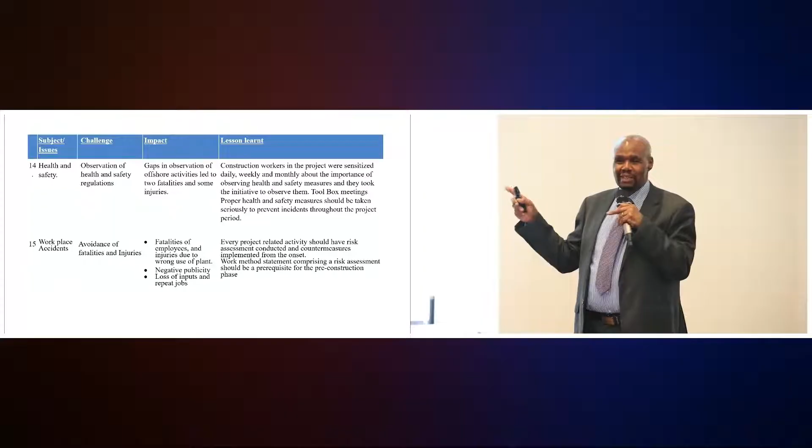I think we were casual at first. Some Kenyans also take things lightly, but we had a fatal accident, 2 people died, and they were not even Kenyans. It happened in the evening, and from there we became very cautious. So anytime you come to our project, even now, before you come we must induct you in terms of safety. From there on, our project has won twice the best safe projects in the country. I don't know who was awarding that, but I was told we have been awarded.

Can you move this? I think it's serious. Oh yes, sir, yes, now quickly on the works.

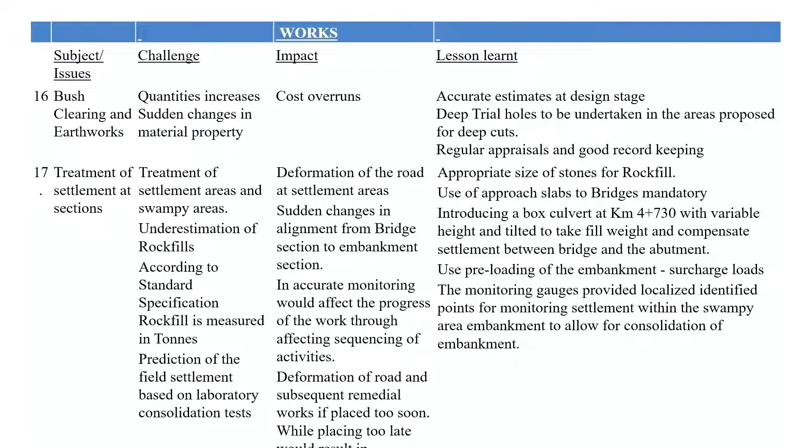I was saying it's good to review the project documents. In one of our documents, one of the mistakes was in the bush clearing. Instead of putting bush clearing in terms of hectares, somebody had gone further and counted the number of trees, confusing the diameter of a tree with the girth. The girth is the circumference, so if somebody assumes the girth as the diameter, the quantities become very high. We had to get around that problem because the contractor was going to do bush clearing and claim about 400 million.

Then treatment of the settlement areas. Because of the failures we witnessed with rock fill, if you go to our specification, it talks of stones of 300 millimeter diameter size. But if you go into this type of swamp area and put 300, they sink and disappear. So you have to come up with a different design for your swamps. In fact, you have to use very huge rocks to key in there first.

In our swamp, after rock fill, we had to build the embankment to a certain level with extra weight, which you monitor for some time before you put the pavement. In package 1, we did not treat Agor Bridge properly. If you go there, you find a drift there like a bump, because from the bridge we had about 15 meters of fill on the swamp area, but the way we treated it was not very good, so there has been settlement over the years. Right now it has stabilized, but at that time when we put the pavement, it was still undergoing settlement. So in package 2 particularly, we had to make sure that before we put the pavement, we had reached the end of the settlement.

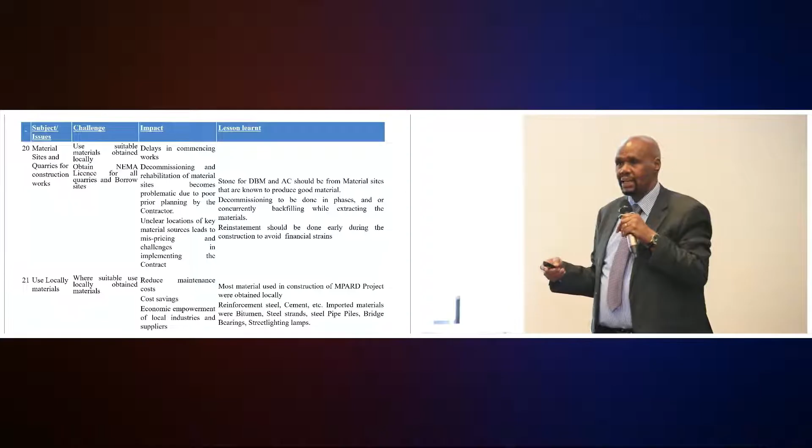Our material sites, when it came to package 2, we had a lot of problems getting the correct materials, but we still wanted very high quality, particularly for subgrade. So we had to be very careful with the material for DBM. One thing I want to encourage engineers: when it comes to AC or DBM hardstone, try to use stones or material sources known to produce good quality. If you start using new quarries, sometimes like in coast areas, we have a lot of disappointments. As far as possible, use locally available material, you don't have to go far. But in Mombasa area, you cannot get good stone for surface dressing, so people come all the way to Nairobi to get good quality, particularly class 1, which we are looking for.

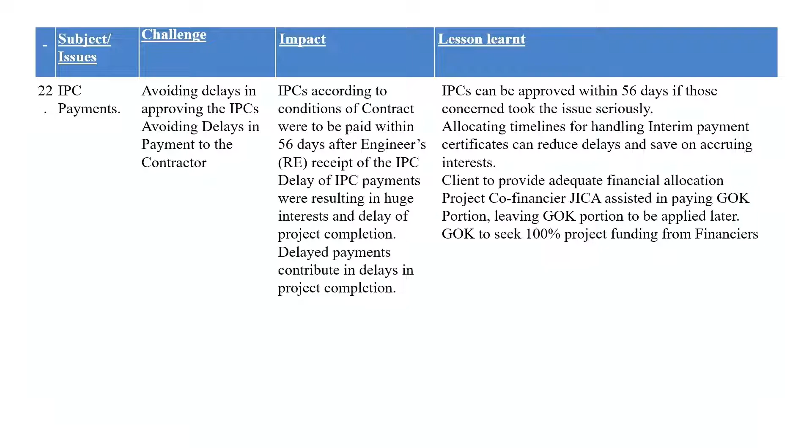IPCs - just to finish on this - we have not had a lot of success in this area because of payment, and as a result we have been punished heavily. In package 1, interest on delayed payment alone is 600 million. Package 2 is reaching 550. So we need to do something. I know there is a cash flow problem, but in projects of this nature like ours, the approval time of IPCs is 56 days. Any delay in the process counts within those 56 days from the time you receive the RE, not when it is approved by Kenya. From when the certificate is handed to the RE, days start counting - 56 days. So you can see we have been punished heavily because of that.

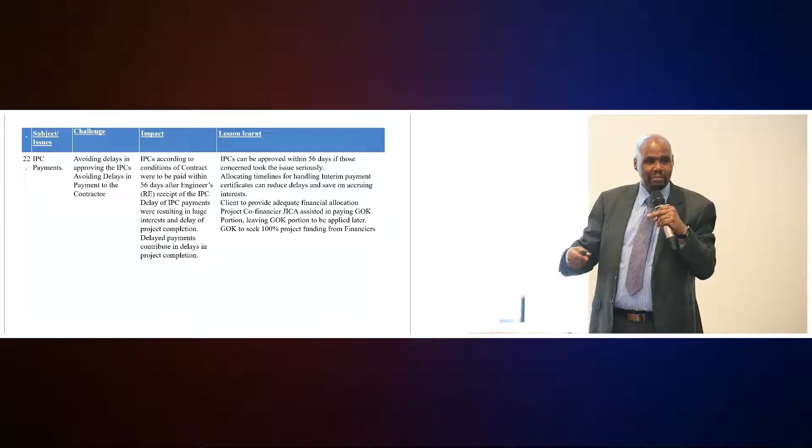Because of payment issues, we engaged the financier, JICA. First, regarding retention - since it was 80% to be paid by JICA and 20% by the Kenya government - we agreed the retention will go to Kenya, so that Kenya would only be paying 10% for the time being, and JICA agreed to pay 80%. But over time, even that 10% was not forthcoming, so we negotiated with JICA to pay on our behalf, and the Kenyan government, which has many pockets, can pay at the end. That's what we are doing right now.

Variations of price - I'll go quickly through package 1, package 2, package 3. You can see where we have issues, what have we done mostly - it is from the formula and the contract overrun. You can see package 1 is 0.1, package 2 will be about 1% maximum, and package 3 is 3.3.

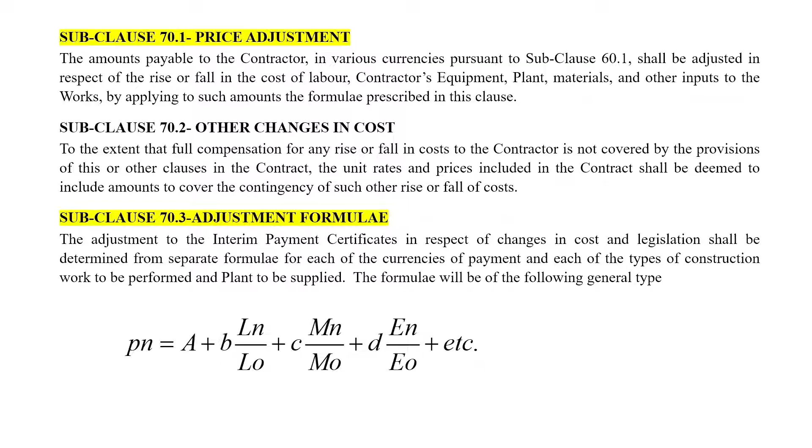It's very important from this formula - and I've given this talk before - when you are doing your variation of price, if you are doing design freeze, this factor here called A is very important. This means what you don't want to be affected by the variation. A number of people have been putting 0.1. In another talk I gave, I showed everybody why it cannot be 0.1. In my assessment, it should not at any time be less than 35%, 0.35 - it should be higher than that. It's the element that you don't want the contractor to benefit from variation of price, which includes his profit, his investment - all those things you should not compensate the contractor for. You want to compensate the contractor for variation in price of fuels, lubricants, steel, not for his own investment. So people have been making a mistake - they put this factor low, which means the other factors B, C, D become high. But by making this high, those factors become lower.

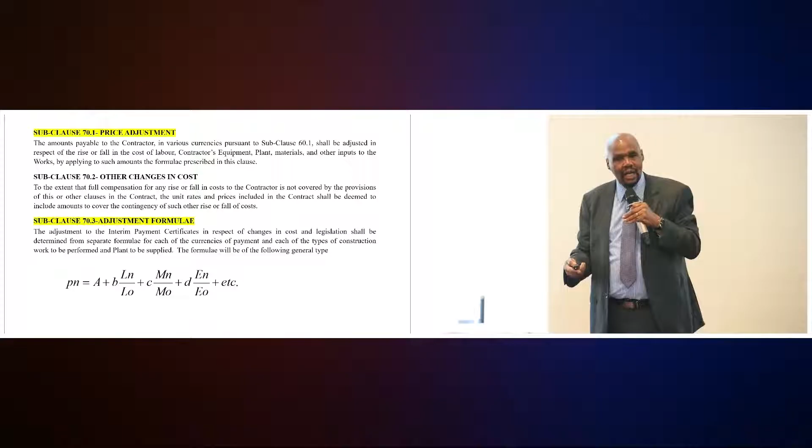Some contractors have anticipated what is likely to happen. For fuel, over the last 2 years, somebody checks and finds that most likely in the next 2 years steel or fuel will increase, and he puts a bigger factor on that one. So the conditions of contract do allow you to check later, particularly if you find that they are unbalanced. Then you can call the contractor and tell him we have to revise these factors. Because in some projects you find somebody has shown fuel is 30% - that can't be - or steel is about 40%. If the steel price doubles, you can see why your contract cost quickly doubles.

Those factors, normally people have not been revisiting them during the tender evaluation, but somebody has to be looking at them constantly. Because if the variation can account for 40%, it means at the tender stage, you never looked at 40% of the element of the contract. So it's necessary to look at that.

Finally, knowledge transfer is very important for all of us. Let's document lessons learned during the project and even after. In our project, we've had several workshops where we invited people from Kenya and other places to come, and we've taken them through the process of what we've done. We are trying to document everything now.

Training was part of our task, which we wanted to make. I don't know how many of you have benefited from that. We have trained, including the last one, on BIV equipment for bridge maintenance, and we had several calls coming in to be trained on bridge management and maintenance. So it's necessary throughout to document and transfer the knowledge acquired.

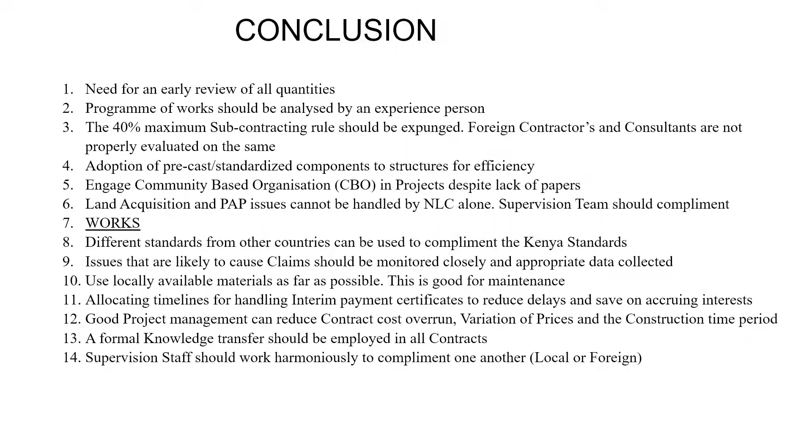Standardization of elements in structures is necessary. Please also engage the local community, see how the local community can blend into the project. CBOs, there are some few things they can do. Land acquisition should not only be left to KeNHA and NLC; the supervision team should take an active role over it.

Different standards can be used to augment what Kenyans have, but you must know what you are doing. An engineer must always know what he is doing. Issues of claims monitoring, you have to do that from day one. Don't wait for the claims to come. Put everything in proper perspective.

With good management, we can reduce contract cost overruns, because this is very important for an organization like KeNHA. You have your budgets; overruns stretch your budgets. So good management can help, and one of the ways to do this, in the recent past, is to check on the variation of price.